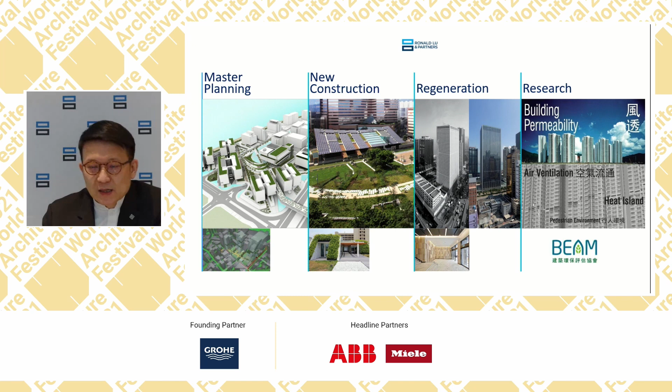We have been working on a wide range of different projects, from master planning, new constructions, existing building regenerations, to research. In fact, we are one of the rare companies that engage heavily in research. On the research front, we actually help inform the local government to adopt some standards and practices in architecture, and I will share some of them in my talk here.

Today I would like to share a few things. Firstly, about our attempt at making urban living space more sustainable in the context of high-density cities, which we think is the future, especially since cities are high density these days.

We conducted research on outdoor living space, which could be modified and shaped by building design in a number of aspects. First, the building's permeability. Secondly, the greenery, the urban greenery we manage to preserve in the city. Last but not least, with compact density in the city, how buildings should create space between themselves, especially near the streets.

On that front, we look at local, overseas, and mainland examples, and come up with a standard informed by performance-based study simulations. We advise the government on guidelines we put together called the Sustainable Building Design Guidelines. These days in Hong Kong, if you comply with the recommendations in these guidelines, this is one of the prerequisites to enjoy an incentive for extra gross floor area, which people are very interested in.

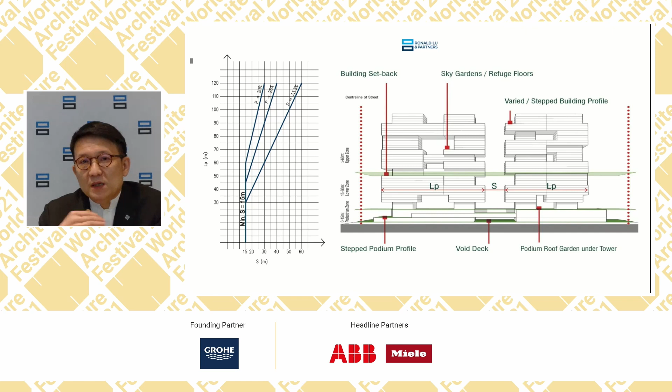We call this vertical microclimate. We come up with three zones, for roughly every 60 meters there is a substantial change in vertical microclimate, especially near the street at 15 to 20 meters, where we need to pay particular attention. So for each zone, we call it the pedestrian zone, the mid zone, and the upper zone.

In a vertical city, we come up with building permeability requirements that certain high-density designs need to comply with. This ranges from a minimum of 20% up to a minimum of 33%, depending on development size, facade length, and building separations.

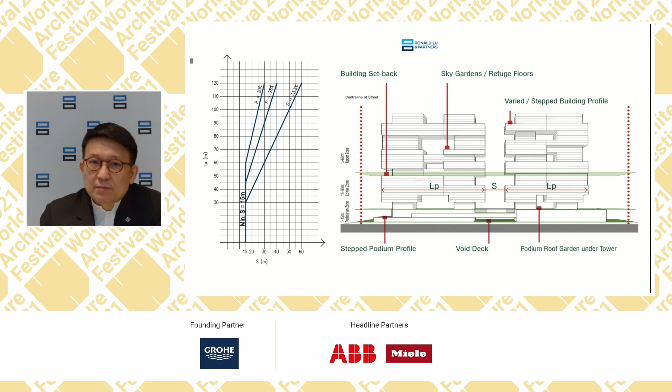Together with our partners and clients, we studied the impact of the Sustainable Building Design Guidelines in Victoria Dockside, a mega-size development. We carry out post-occupancy evaluations on how the guidelines are actually making an impact in real life. After the project was completed two years ago, we carried out on-site measurements.

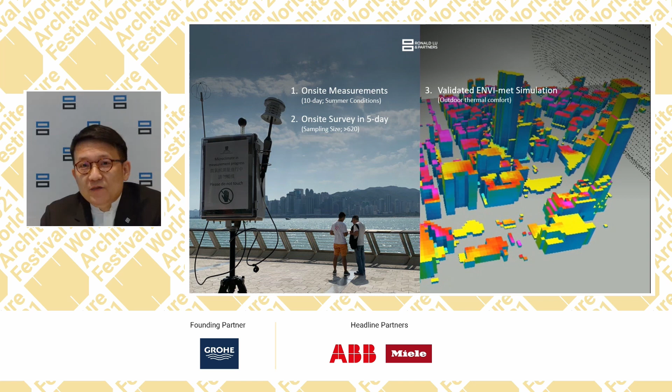We also carried out surveys with the users of the space, and conducted ENVI-met modeling to validate our assumptions during the design simulation stage, and comprehensively reviewed the microclimate situations and readings.

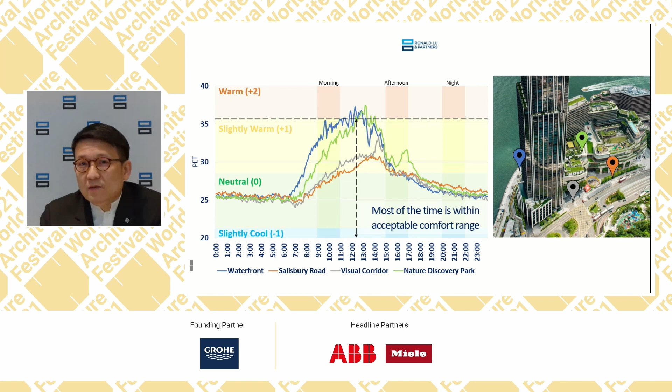What we find from the actual measurements and the environmental models is that most of the time, the urban space surrounding Victoria Dockside is actually very comfortable, within a comfortable range. This is particularly challenging for Hong Kong summer, which can get quite hot and humid.

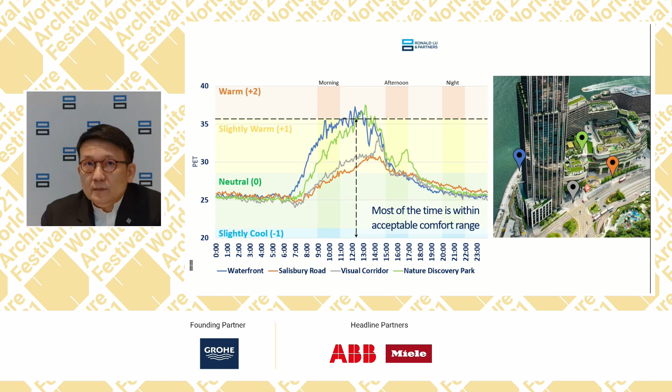It is encouraging to see that no microclimate impact surrounding the neighborhoods resulted from Victoria Dockside after the redevelopment. The redevelopment actually put in 40% extra development intensity compared to the pre-development stage, which is quite encouraging, and this is verified by our on-site measurements and models.

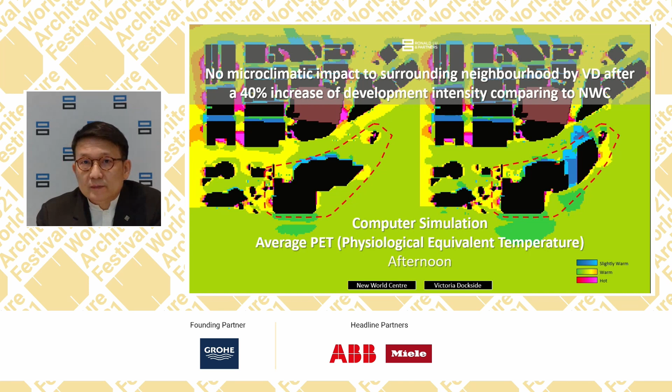Besides mega-size new buildings or new developments, we are also lucky to engage ourselves in urban regenerations of the city. I would like to share with you an example of the China Resources Building in Hong Kong.

The China Resources Building in Hong Kong is located right in the middle of the city, Wan Chai, surrounded by buildings packed very close together. The building, before the regeneration, had been there for something like 50 years.

We managed to convince the clients that rather than demolishing the building, we could renovate it with a smaller carbon footprint and less disturbance to the users. We managed to retain 97% of the structural elements and maintain 100% of the operations during the regeneration process.

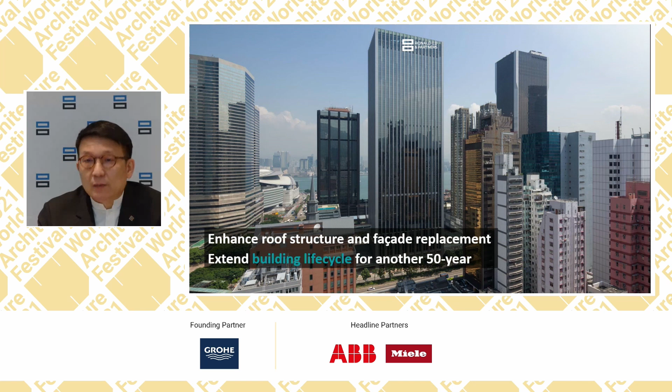Besides the additional skin of the tower, for the podium we also suggested and implemented relocation of the podium masses, taking out some of the masses to create better permeability, opening up the podium and creating a 24/7 open space with enhanced urban ventilation to the neighborhood.

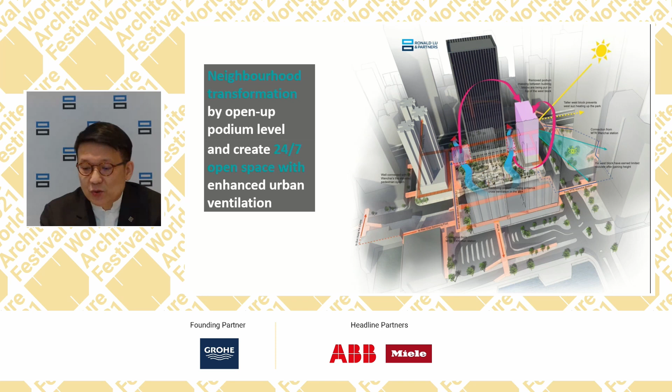This is the double skin I talked about. We retain the existing envelope, and all the floors and the roof are retained. This high performance facade gives us a very good OTTV, what we call in Hong Kong the overall thermal transfer value. It keeps the OTTV very low and helps conserve energy for air conditioning.

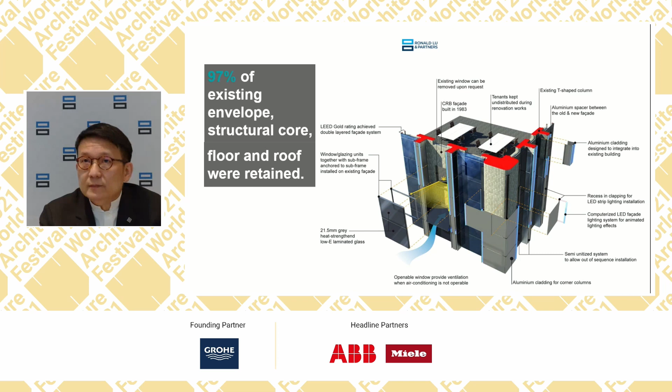Last but not least, I want to share with you our attempts at designing for the climate generations. We see the rise of a new climate generation who want to make a stride to change their futures and reinvent the relationship between the earth and human beings. How will they want to live, work, and play differently in the future?

One project we explore is this high vertical campus in Hong Kong, THEi, located quite close to the harbor. In the site planning stage, we took extra effort in how we could manipulate and articulate the architectural volumes so that they open up to the summer prevailing winds, create shade for the student space within the campus, and help screen the noise from the elevated railway link and a highway.

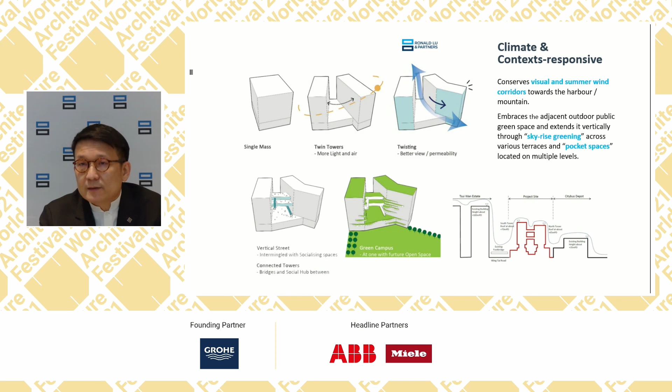So the result is a twin tower with a lot of connections in between. This is the student plaza where the town and the gown meet, on the first floor, raised above the urban pollution and exposed to very good urban wind.

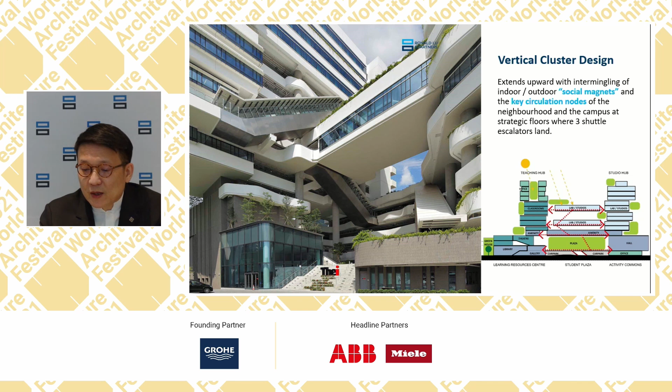As we go up, there are a lot of spaces where students can congregate and interact in these shaded semi-outdoor areas. They are located along the vertical campus on different levels near the key circulation nodes to promote circulation and to promote planned and unplanned encounters with a lot of greenery.

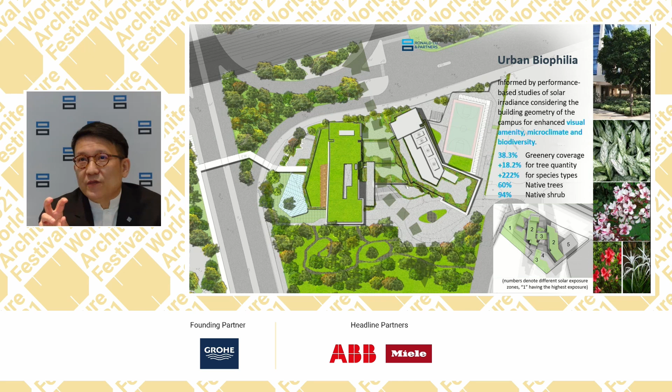When we plan greenery on skyscrapers, we have to be aware of the urban geometries of the building itself and its layout. It is informed by a performance-based study at the start of the design stage, where we identify different microclimatic zones on different levels of the campus and advise the landscape planning.

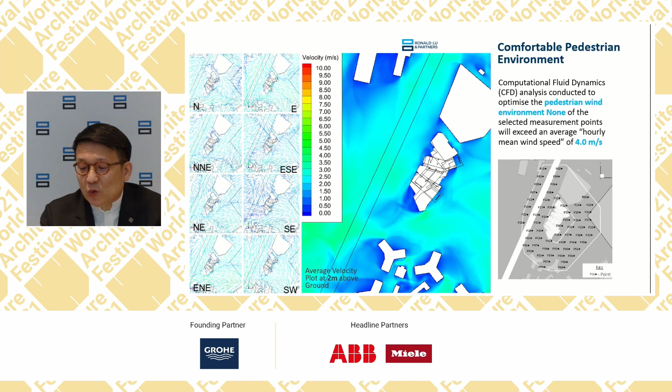The wind environment, especially near the streets, is carefully studied to make sure there are no wind amplifications, and to make sure the wind is comfortable for thermal comfort.

Most of the indoor space, over 80%, actually adopts daylight and has very good views towards the inside of the campus and outside of the campus. And with such an urban campus, over 80% of the space achieves an average daylight factor of 1%. Actually, this is quite an amazing performance.

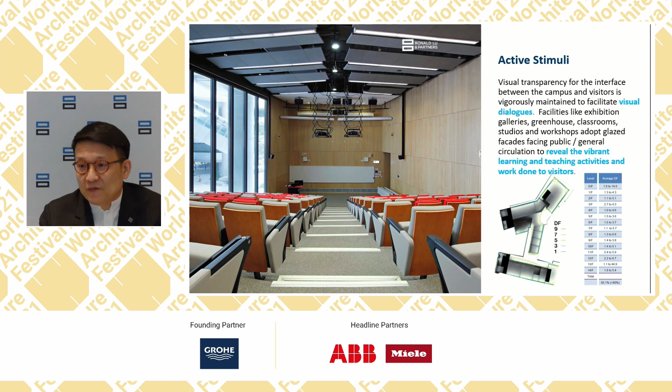For the carbon footprint and the energy consumption, we managed to achieve an impressive result, about 22% below the energy code in Hong Kong, and 25% reduction for the peak electricity demand as well, given the passive and active strategies we have suggested.

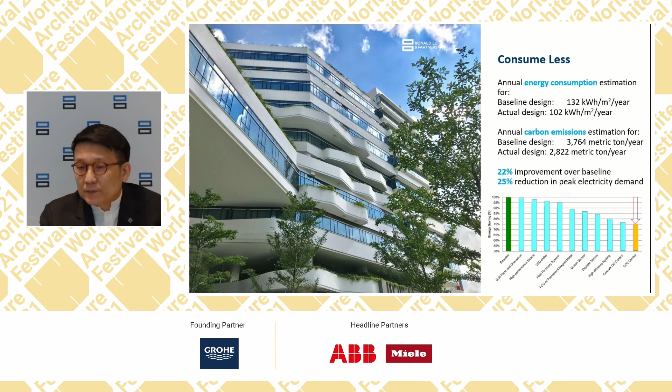When we think from building life cycles, we think it is crucial that the spaces are adaptable spatially and structurally. The structural span is quite comfortable, from 9 meters up to 13 meters for the two towers, making sure that the spaces are loose fit and multifunctional for the purpose, for the use.

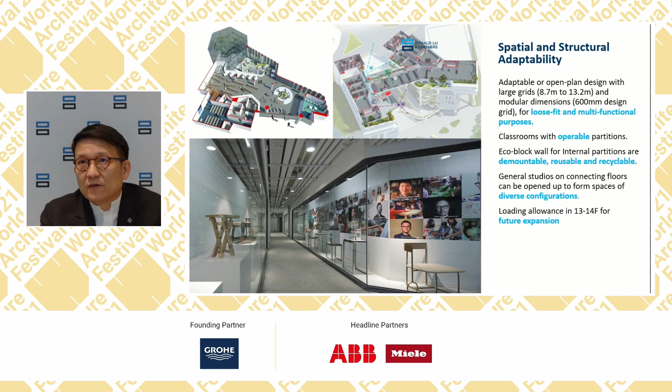A lot of the classrooms are actually provided with operable partitions so that they can combine together and form a large space, large studios. And the studios on the connecting floor can actually open up to form spaces of diverse configurations.

To make sure we waste not, want not, we even make use of some of the waste—in this case, carbon dioxide from adjacent occupied functional rooms. We channel the carbon dioxide from those spaces back to a tailored design greenhouse next to the learning common, so the plants there can enjoy a very high level of CO2, around 800 ppm.

This happens when the sensors tell the system that there are no occupants inside that greenhouse. But when students and staff actually get into the greenhouse for education, teaching, or learning purposes, the system will adjust the carbon dioxide level automatically.

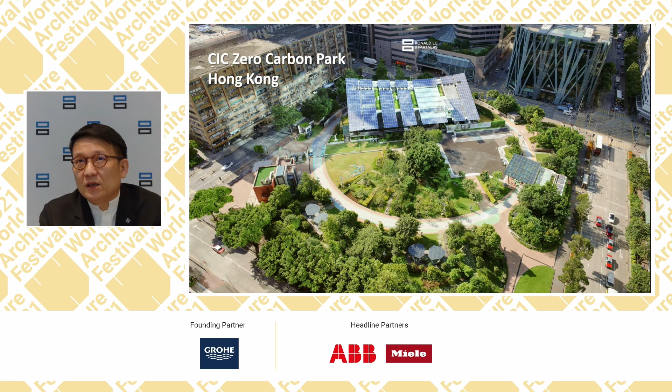Another project I would like to share with you is the CIC Zero Carbon Park. This is the first zero carbon building, and at the moment the only zero carbon building in Hong Kong. We completed the building something like 9 years ago. It is right in the middle of the city, East Kowloon, and the context as well is very high density.

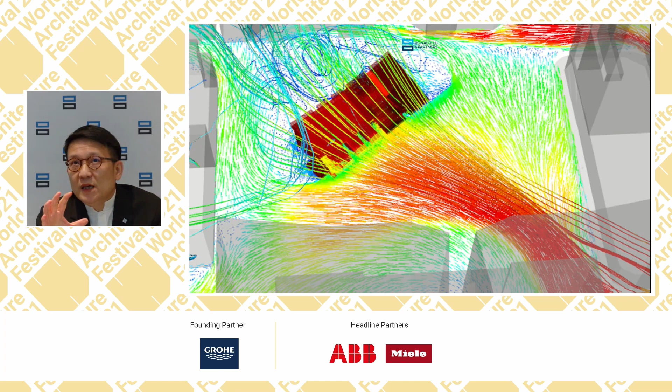We look at the urban wind in the summer and annual situations, and design the building dispositions accordingly to capture the best wind of the site.

By doing so, the outdoor space in the middle of the site actually has a very good microclimate with good air ventilation, and the greenery surrounding the site helps to screen out the noise and pollution from the street as well.

The interior of the zero carbon building is open plan. The envelope has window actuators, which the building management system can use to advise whether the window opening should be, or the size of the window opening.

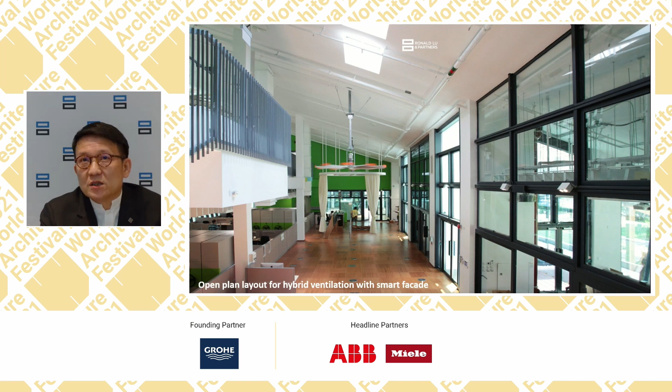Besides the cross-ventilated layout, we also provided high volume, low speed ceiling fans to actually provide assisted ventilation before the air conditioning system kicks in during high summer.

The strategy's primary focus is on passive design and high performance active design, reducing the energy demand by something like 45% before we adopt renewable systems, looking at how we should approach renewables.

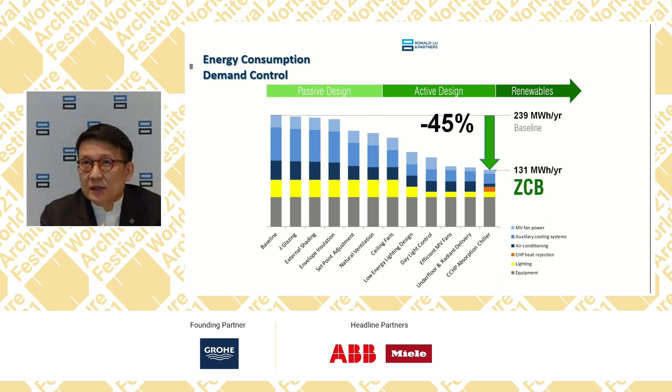The renewable energy system we have adopted is a waste-to-energy system, turning biofuel made from waste cooking oil to be used in our trigeneration systems, which gives out heat, electricity, and cooling for us.

This is the game plan for the zero carbon building. We also consider the upfront carbon from the materials and construction, and how we can offset that upfront carbon together with the operational carbon through on-site renewables.

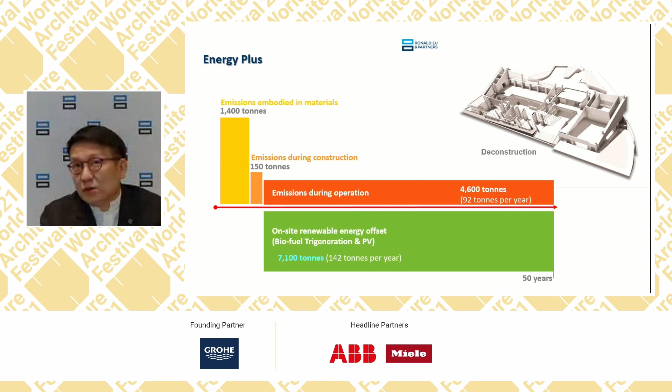Coming to the last project I'm going to share today, the Treehouse concept. It is a competition entry we managed to win in an international competition organized by the World Green Building Council and the Hong Kong Green Building Council, on the theme of advancing net zero. The subject is about high-rise office buildings—how we may achieve or advance net zero for such a building type.

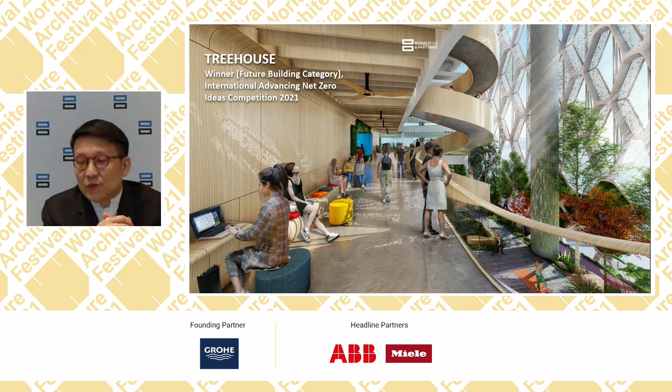The result is what we call Treehouse. I would like to recap the design essence of our concept. First, we propose it is very crucial for human-nature connections and also microclimate, especially the vertical microclimate, and that the building should actively respond to that.

The workplace should be adaptive and also activity-based, to cater for the new working style, probably in the future. And also, we should focus on whole life carbon.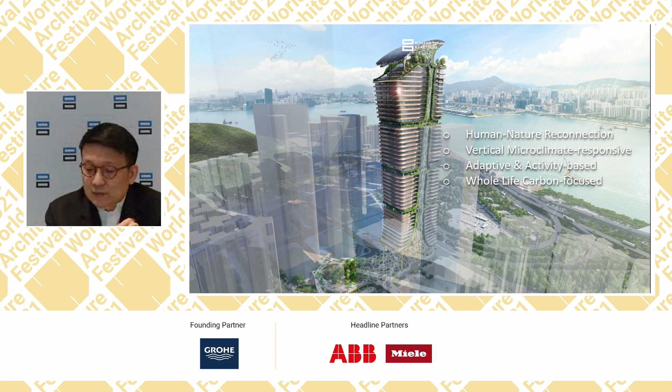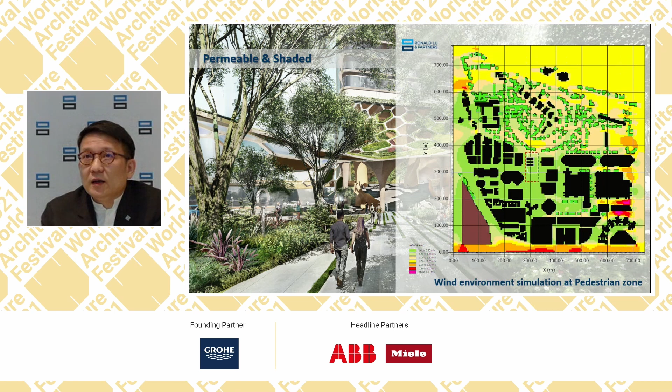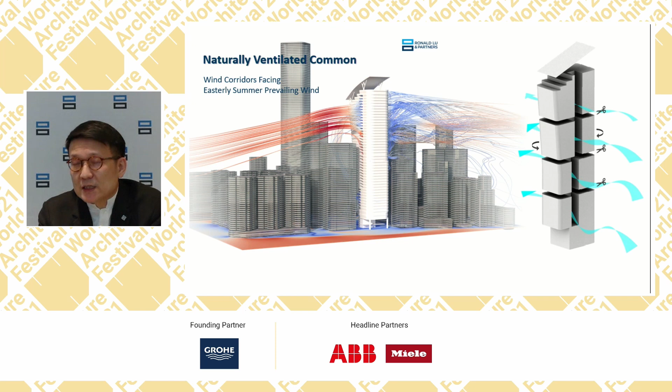First, on human nature reconnections. The permeability of the building design actually welcomes the summer prevailing wind, as we notice from our site microclimate studies. The prevailing wind comes from the east, from the harbor, and the open space and common space in the buildings are naturally cross-ventilated, opening up to that summer breeze on all levels.

Greeneries are proposed at the doorsteps of the workplace on an atrium we call Sky Common, together with the urban woodland on the ground and also the sky gardens - three sky gardens along the tower - and the roof garden. We managed to achieve a tree coverage of over 31% and overall green coverage of 137%.

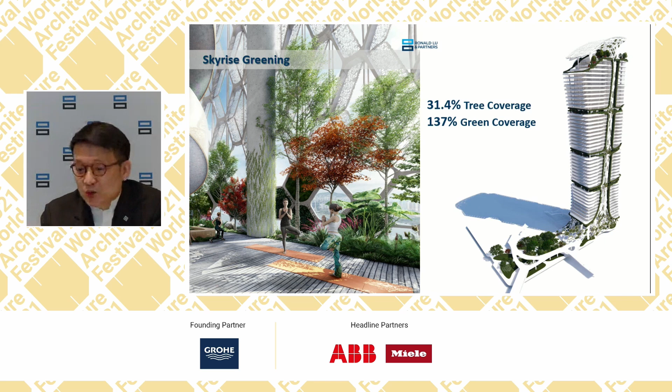Vertical microclimate responsive design - by that, we look at the self-shading building form. The form cuts off 19.2% of the solar irradiance during the summertime.

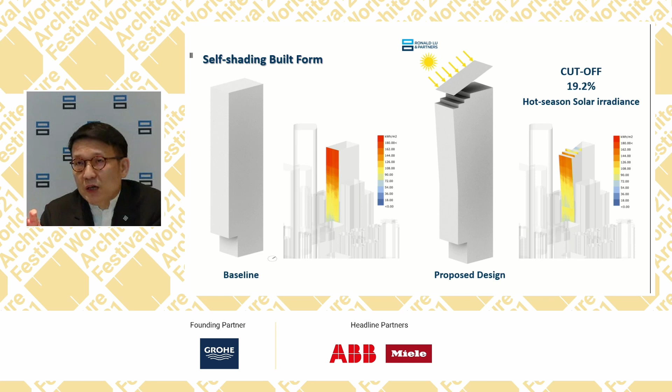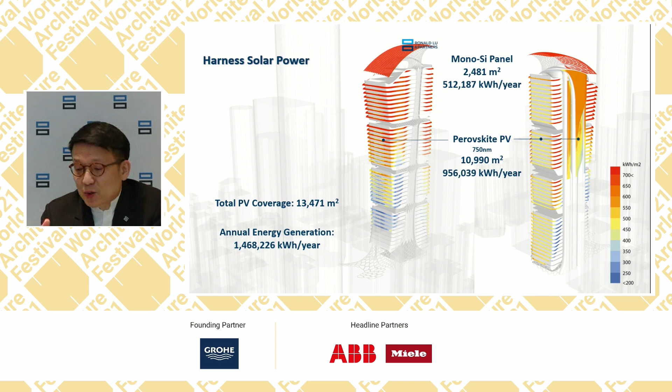And on the facade, we plan a building integrated facade. We make use of thin perovskite thin-film technology, which is very light, and it gives us a very good renewable energy output. Together with the roof canopy, it gives us something like nearly 1,500 megawatt hours per year of renewable energy.

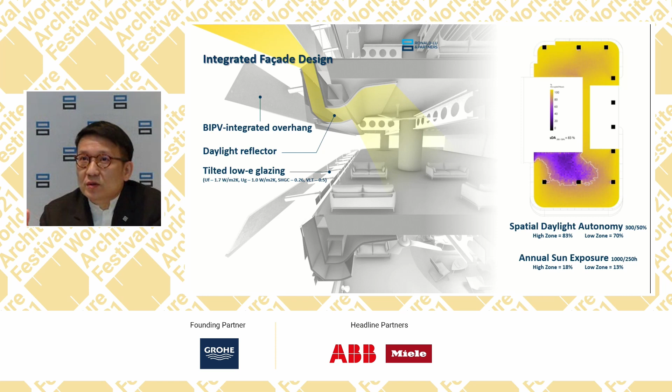The integrated facade design comprises, as I've mentioned, the building integrated overhang and tailored daylight reflector together with the tilted low-E glazing. Altogether combined, they give very good solar shading and a very low thermal heat transfer through the envelope, and at the same time give us very good daylight performance, as demonstrated by our lighting studies for the spatial daylight autonomy and the annual sun exposure.

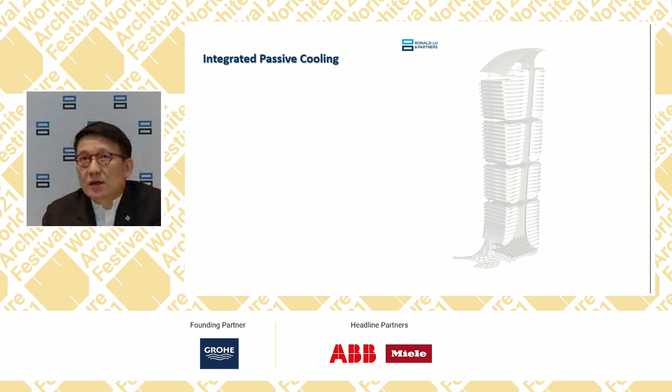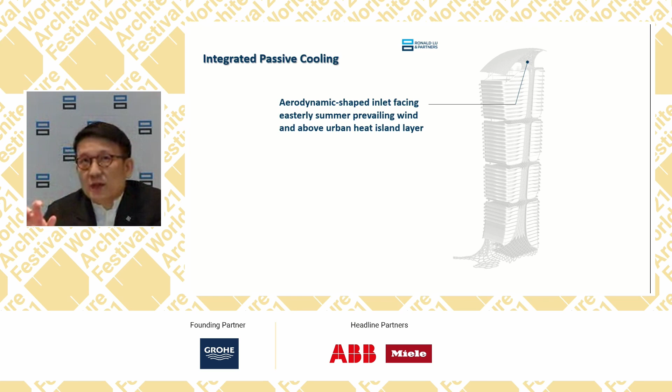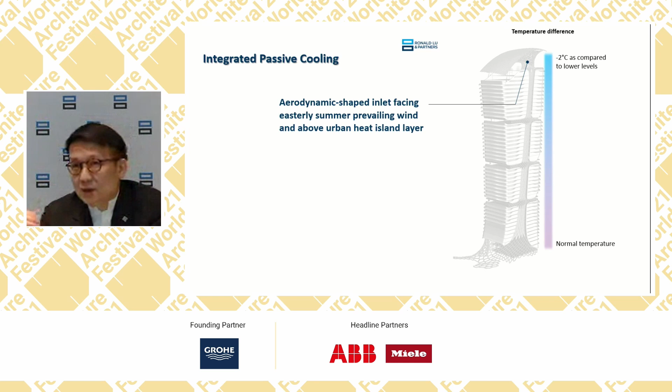The integrated passive cooling concept is actually one of the key features of the design. We propose a wind shaft with an aerodynamic shape inlet on the rooftop to collect and channel the cooler air from the rooftop, which is something like 2 degrees lower than that near the ground. The wind shaft internally is clad with hygroscopic terracotta cladding to passively manage the humidity of the air.

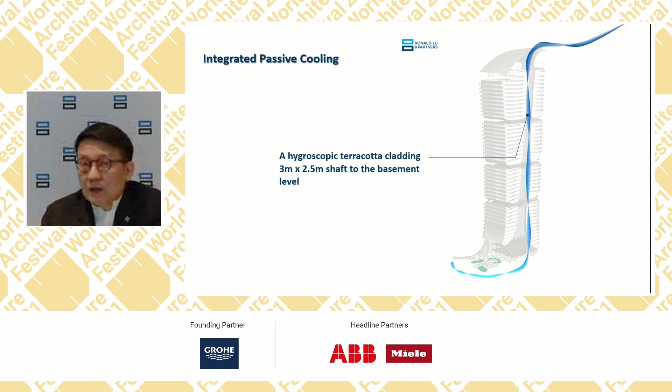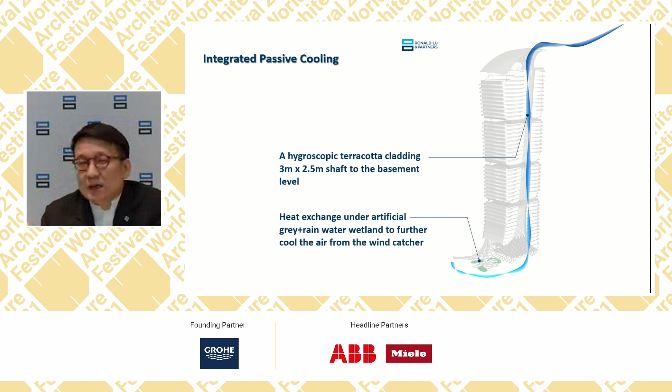And the air is channeled to the basement where it goes under an artificial wetland. We designed a heat exchange mechanism to further cool the air using the artificial wetland. The air is eventually brought out by the solar chimney, which is clad with BIPV again, and the waste heat from the BIPV and also the regenerations - the desiccant regenerations in the PAU, the primary air units - gives us a very good thermal buoyancy effect to bring the hot air out to the top of the buildings.

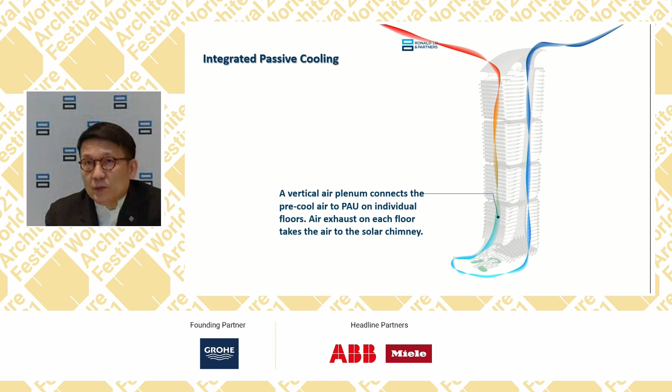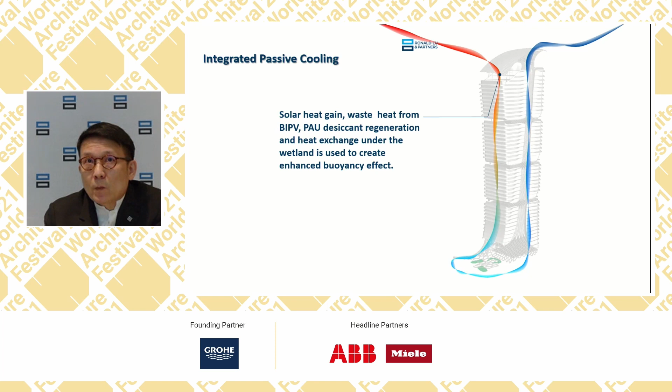Adaptive and activity-based. Post-pandemic, we understand people are making new choices on where they work, how they work, and when they work. The activity-based concept allows workers a flexible working manner. They can come to the office when they need it, and the AI system suggests spaces which can match their thermal preference in the office.

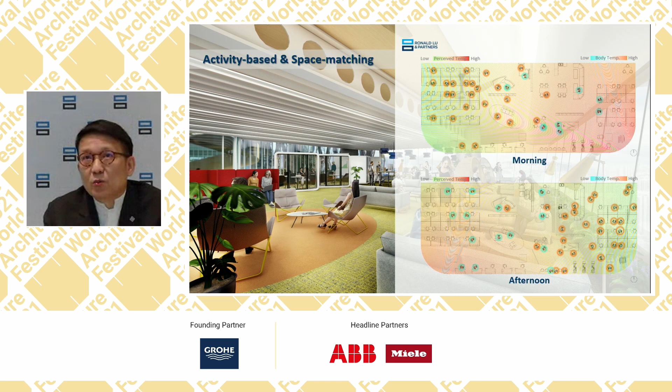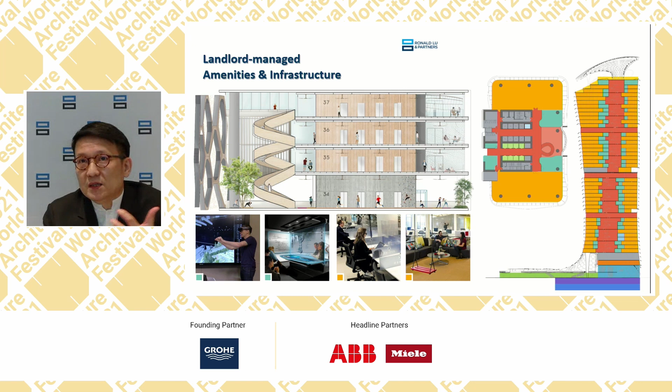For different spaces, we deliberately create different thermal gradients, so people with different preferences may choose where they want to work. Landlord-managed amenities and virtual desktop infrastructure also enable such a flexible working manner. So people may work in a flexible manner, meet their collaborators, and find a spot they like at their own will. We adopt an adaptive comfort approach rather than just the notional VAV systems.

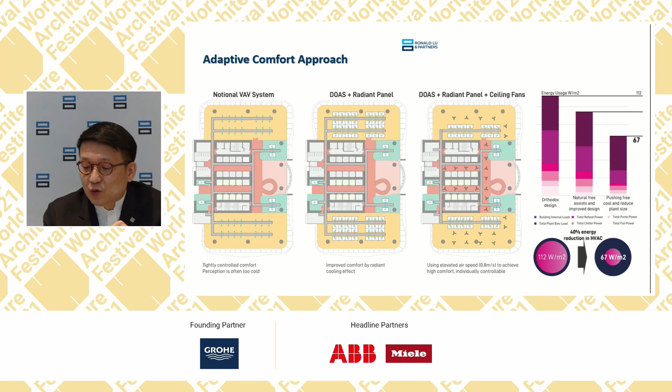We eventually suggest radiant panel systems together with ceiling fans, where different thermal gradients are achieved to meet the diverse needs of the occupants. These are some studies we carried out, demonstrating that the adaptive comfort approach can actually achieve a very high satisfaction rate, rather than controlling the air temperature stringently as in the conventional case.

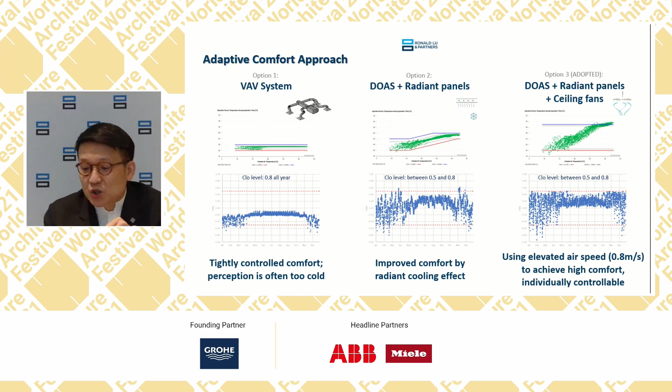I would like to show you a video.

We live in a generation of change. Global warming, pandemics, extreme weather have only inspired us to make change and create a resilient future by revisiting our roots. Nature, the one source that nurtures and gives us life. Nature wastes nothing, and in the perfect world, our existence not only complements it, but helps it thrive by achieving carbon positivity. The concept of a sacred union between man and nature also runs deep in ancient cultures, like the Chinese word for wood, which celebrates our place on Earth.

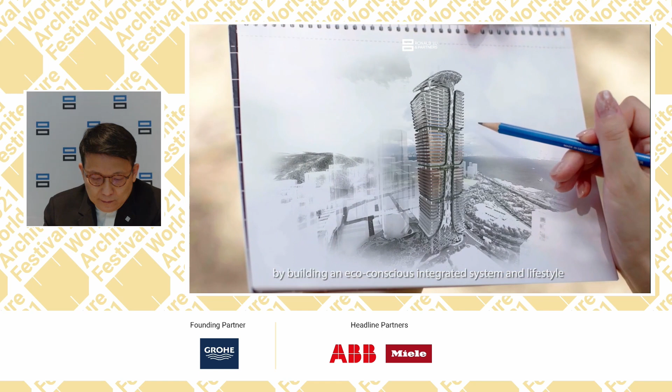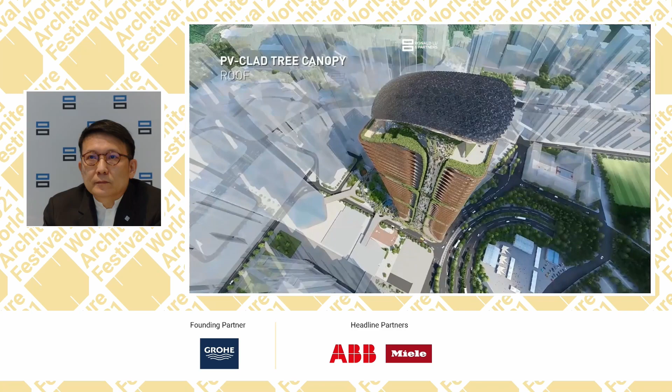Perhaps now is the time for us to reset by building an eco-conscious, integrated system and lifestyle. Welcome to the Treehouse. This is a new caliber of workplace that promotes carbon positivity through cutting-edge technology, design, and management. To regulate the temperature of the building naturally, self-shading facades for upper stories are in place to avoid solar heat, as a rooftop PV system helps generate renewable energy while doubling as shade for the roof.

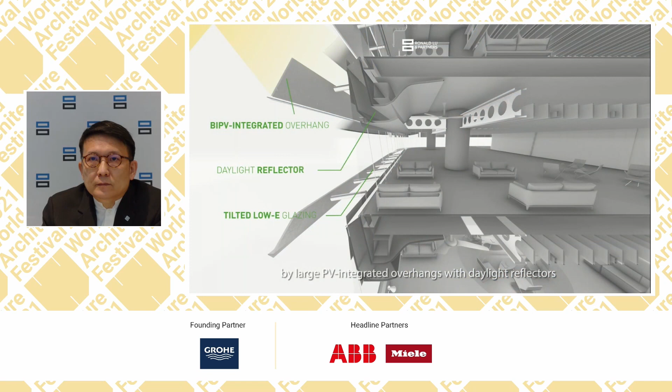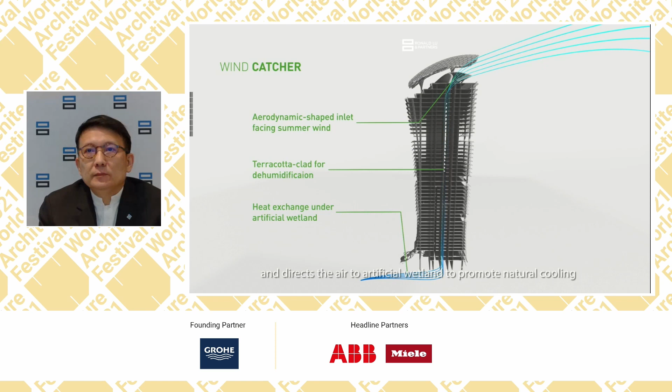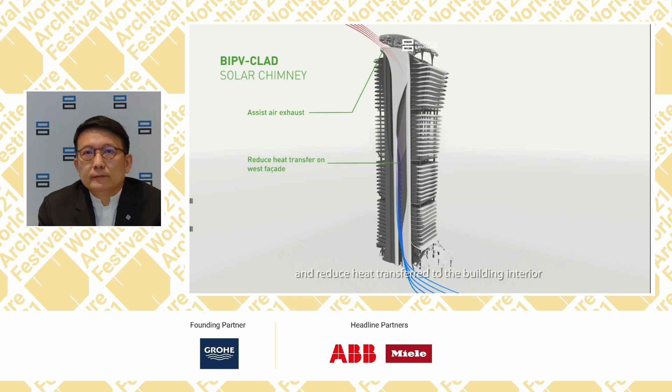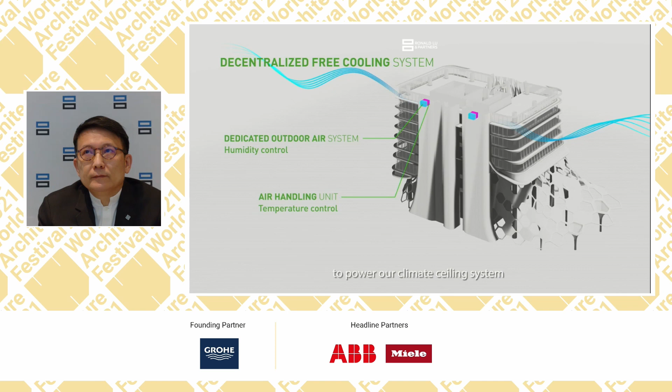Natural light is introduced in the building by large PV integrated overhangs with daylight reflectors. A wind catcher captures cool air 200 meters above ground and directs the air to an artificial wetland to promote natural cooling. A BIPV clad solar chimney is also in place to generate natural ventilation and reduce heat transferred to the building interior. Separate temperature and humidity control allow extremely high COP chillers and high temperature chilled water above dew point to power our climate ceiling system. The phase change material thermal storage provides buffer to lower peak demand and to generate chilled water at night.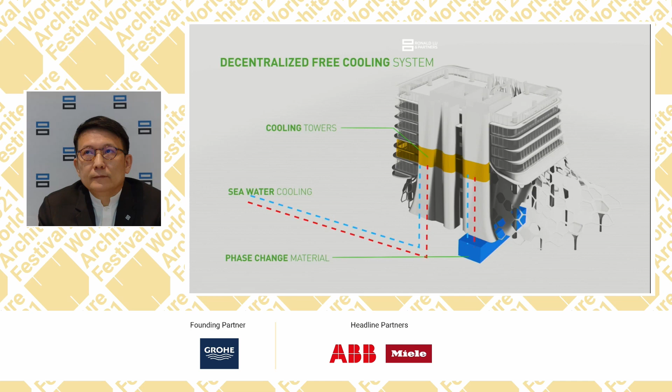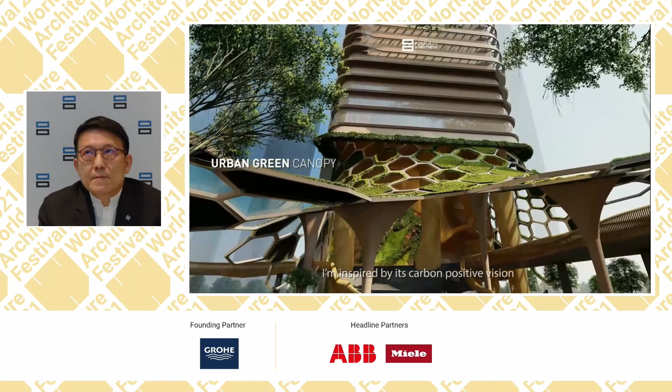The treehouse is welcoming, and I feel like walking into nature when I come in. As the natural forms and greenery greet me, the space is airy and naturally lit with soft breeze coming from all directions. But beyond that, I'm inspired by its carbon-positive vision.

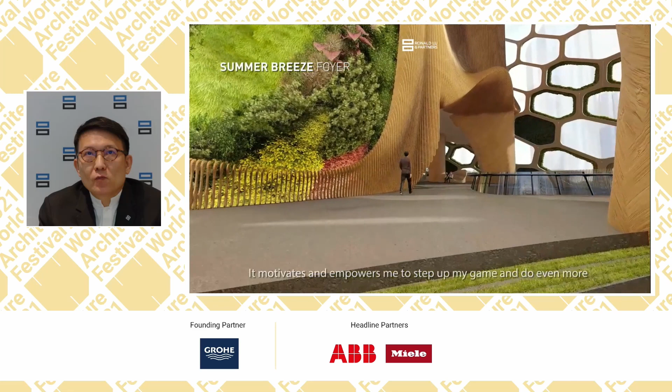I get rewarded with eco-tokens for my sustainable office wear every day. It motivates and empowers me to step up my game and do even more.

The virtual concierge also comes in handy, as it automatically whisks me off to my assigned elevator when I check in on my phone.

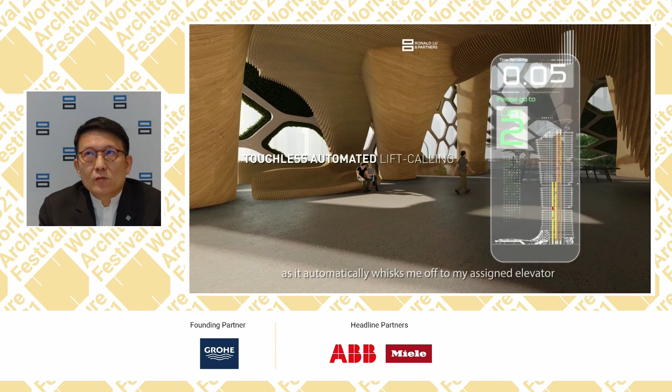We don't come into the office every day like we used to before the pandemic, but every time I come in, I enjoy every moment with my colleagues.

The office is completely versatile and supports on and off-premise work, especially with the Edge data center and virtual desktop system. Fixed desks are obsolete here, and we feel closer than ever as a team, working alongside one another at these mobile workstations.

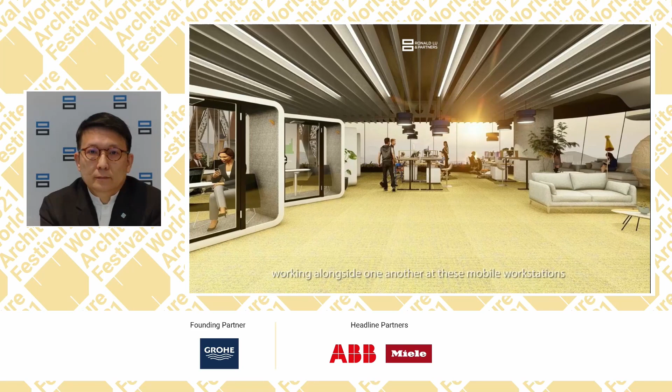The office has been carved up in thermal zones to allow me to work at an optimum temperature based on my needs.

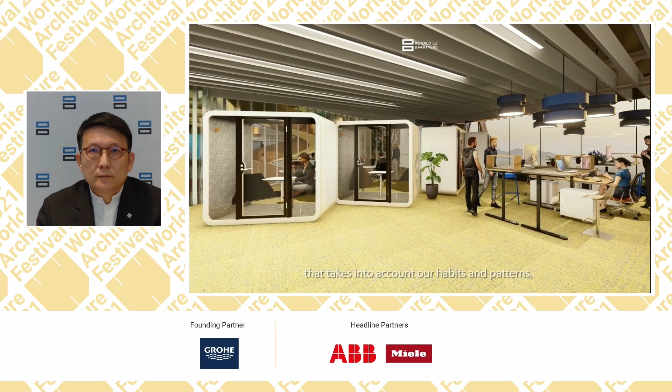The humidity in the office also mimics that of nature's for our best comfort. Our office is truly a seamless experience that takes into account our habits and patterns, so the space can be preconditioned for any occasion.

I come to the Sky Commons communal area for my lunchtime yoga class and occasional social events. The space feels open and warm thanks to the natural daylight and breeze through the adaptable building shutters.

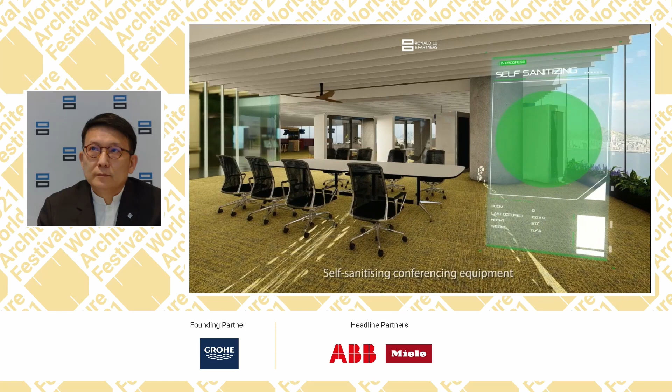Self-sanitizing conferencing equipment are also available for hosting meetings here, and are usually on energy-saving mode until we use them.

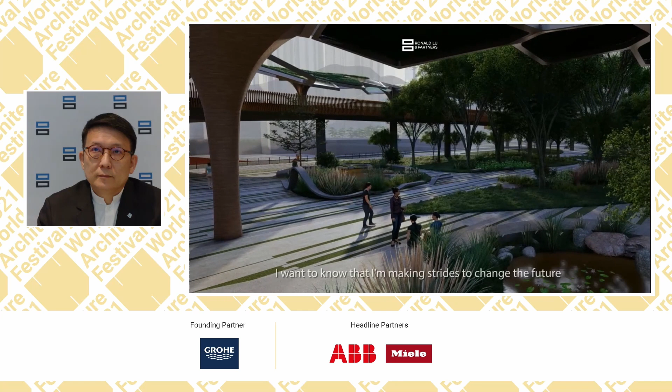When I leave work, I want to know that I am making strides to change the future. I want to reinvent our relationship with the Earth. Working at the Treehouse is my first step to making positive change in the world and be the catalyst to the city's chain reaction for change.

The Treehouse is not only a place for work, it sows the seed of change in our minds, reminding us that only when man and nature come together can we make change and create a sustainable future.

And the last part of my presentation is about the whole life carbon focus, which I think is very important when we consider this.

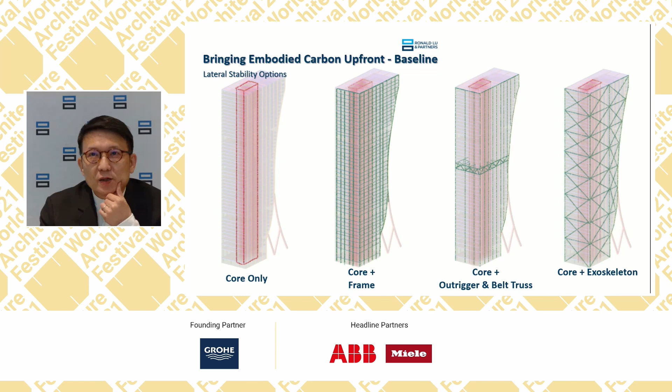I need to stop you there because we only have about 2 minutes left, and I would like to ask you one or two questions to an extremely interesting and full presentation. My question is: is it difficult to persuade your clients in Hong Kong to go along with your environmental proposals? Because sometimes it's very tough, especially with commercial clients. How is it to introduce these ideas, especially to commercial clients?

It has never been easy, but things are changing. Hong Kong, following the footsteps of China, has committed to carbon neutrality, and we committed that we should achieve carbon neutrality by 2050. This policy actually just came out recently.

Most of our clients, especially the bigger ones and the institutional clients, come to us and ask us, well, what are we suggesting? How can we achieve carbon neutrality? Policy drivers are very important.

And can you say how you see the distinction between embodied carbon and operational carbon? Because in many places the embodied carbon is now regarded as more important than operational. What is your view about that?